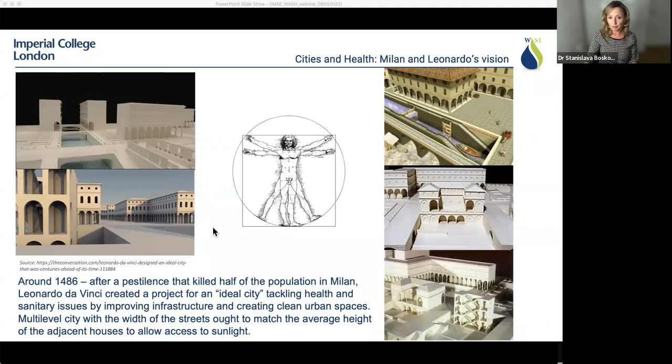All these projects, although seen completely from the planning and engineering point of view, were driven by public health and well-being. I wanted to draw your attention to another very important direction for someone interested, as our research group is, in health and well-being: the work 'Hygeia, A City of Health' by Benjamin Richardson, who was not a planner or engineer, but gave a very precise description of how he thought the city of health should look.

He gave dimensional characteristics, and the population of the city was very well defined. He also talked in his work about distribution, the safety of population, and the equal distribution of population between houses. Of course, about the very important urban element of accessibility, talking about three wide main streets or boulevards, and also the division of different transports in a way to maintain clean air and avoid any disturbance to the life of citizens, always guaranteeing ventilation and housing full of sunlight.

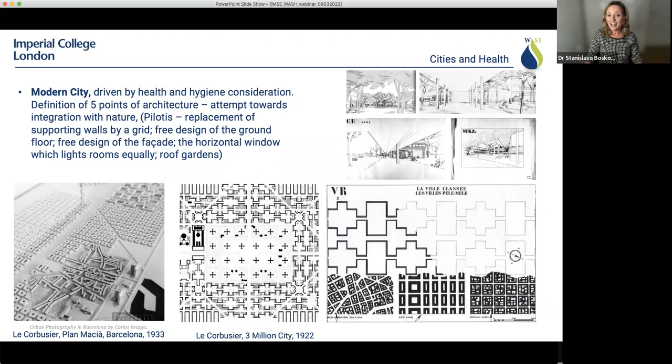So the free grid on the ground floor, in a way that there is always contact with vegetation, the horizontal windows which allow light to be equally distributed in every part of the city, and generally the change of the city from narrow Gothic medieval streets towards a new dimension of blocks that would enhance dialogue and integration between nature and the citizens and residents of the new cities.

As Anna mentioned at the beginning, after this brief introduction on the relation between urban planning and health, our group is working on two European projects, and the first one is HEART, which is Healthier Cities Through Blue-Green Regenerative Technologies. We have just started, and I will make a brief introduction, and hopefully on some other occasion we can speak more about the results or progress of the project.

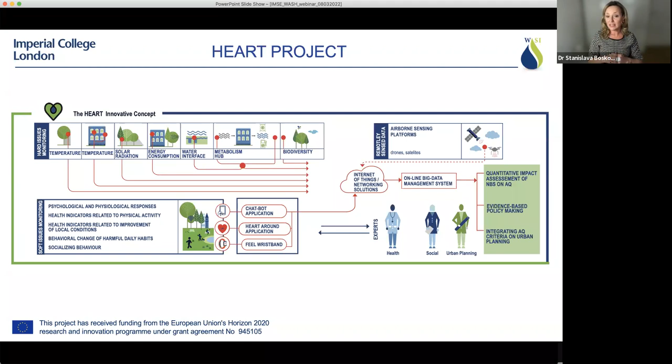This is a project that will use not only the knowledge of the experts involved, but will also have a very strong presence of different stakeholders involved at municipality or governmental levels of the cities being studied, as well as citizens and all others interested in improving health and well-being and improving the health-centered tools that are focused on improving the spaces where we are living.

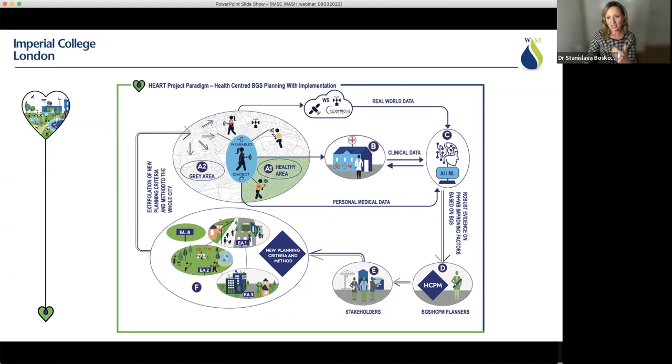And if modern medicine has placed the patient at the center of the health system, this project HEART also wants to put the health system at the center of planning decisions and planning processes that have to be performed to improve the impact on public health, on citizens' emotional state, and also on socializing possibilities, generally improving the process of planning for achieving results that benefit public health and well-being of the citizens.

And now I will focus on another European project called euPOLIS, from the Greek language, which means the city, polis, and health and well-being, the pleasance. So this is the euPOLIS project, a 4-year project, and we are now in the second year. So the introductory and initial part of the project has already started.

This project introduces an integrated urban planning methodology through the implementation of nature-based solutions in public spaces. We will have concrete interventions now in the phase of definition, and hopefully prove the results we are aiming for in 4 European cities: Belgrade in Serbia, Gladsaxe in Denmark, Łódź in Poland, and Piraeus in Greece.

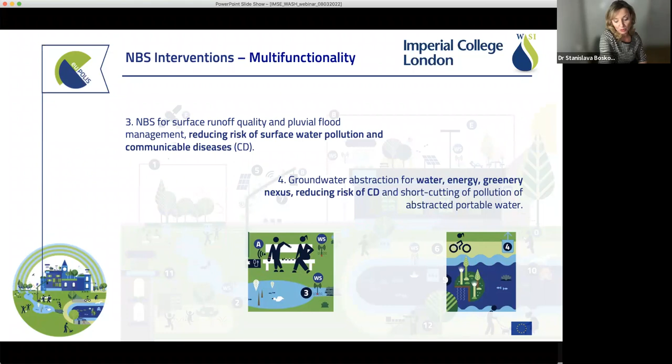Groundwater abstraction for water, energy, greenery nexus, again reducing risk of communicable diseases and shortcutting pollution of the potable water. Of course, air pollution is a very topical issue in many of the cities that we are analyzing now, and we are studying a list of interventions for them in our demo sites.

So these NBSs and the combination of trees, vertical green curtains are meant to reduce the risk of non-communicable disease levels and improve the noise condition, generally having a positive impact on public health of all vulnerable groups: children, elderly, and disabled persons.

There are also technological elements that are helping to create new elements such as green bus stops, and to introduce more typologies of NBS enhanced public spaces, in that sense to increase the number of citizens that use outdoor activities and interactions, creating a positive emotional attachment, as we saw before.

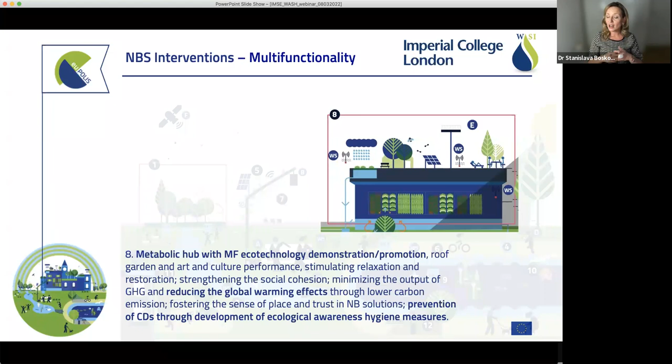And this Eco-Edu Hub, I will show you an already advanced scheme, an example of this Eco-Edu Hub in one of our demo sites, where we will integrate educational notions along with demonstration of NBS technologies. We will also include water treatment facilities and spaces for gathering and developing ecological awareness, necessary hygiene measures, and so on.

Additional elements are multifunctional floating islands that could help for river water purification and improve microflora, and of course the purification of water, but also reduce the risk of communicable diseases that go through the urban water bodies, which could be rivers, in our case, but also lakes or other types of wetlands in the area we are studying.

And we have also demo sites that are on the sea coast, so there are also NBSs that are focused on marine aquatic biotope to improve the quality of the coastal line, and also the spaces connected with the development of nature-based solutions through business activation and promotion of the project, and the sharing of knowledge and experience.

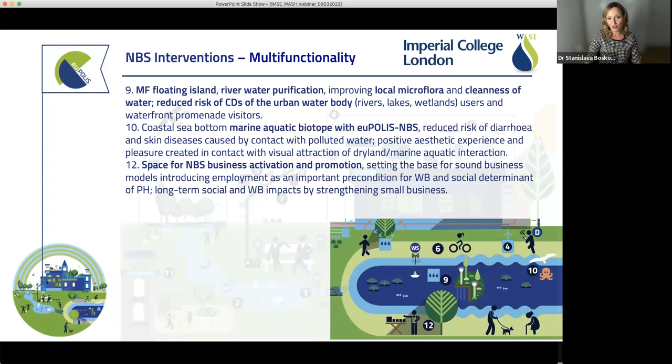Of course, the multifunctionality and integration of different NBSs can be described in the best way through the different functions of trees: shade, but also cooling, air purification that we all know, and creating a wind barrier where it is necessary, like in some of our case studies in Poland, for example.

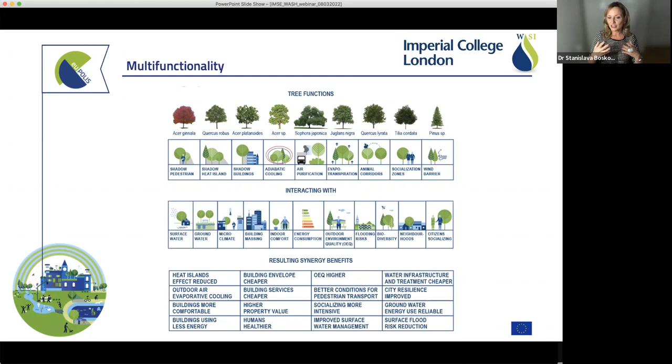The aim of this project is to make these tree functions interact with other elements such as surface water and groundwater, resulting in synergy of benefits, and also to very carefully analyze the choice of tree species that are adapted for specific case studies.

As we know, there are many positive effects, but also some negative effects of trees. So the choice of tree species is very important in our cities to avoid pollen emission, and in that way avoid the allergic effects that are very perceivable in some of the cases we are working with.

To help monitor both the baseline and then the further stages of the project, the results or changes in performance of these spaces after the implementation of blue-green solutions.

There are different devices that will be used, from sensors to remote sensing, but also wearable devices that our technology provider partners will not only choose, but will also help us define eligibility and recruitment criteria of volunteers, train customer supports, and provide proper assistance to citizens during their participation in the project, where information about their emotional well-being will be collected, for example, through this Feel the Emotions device.

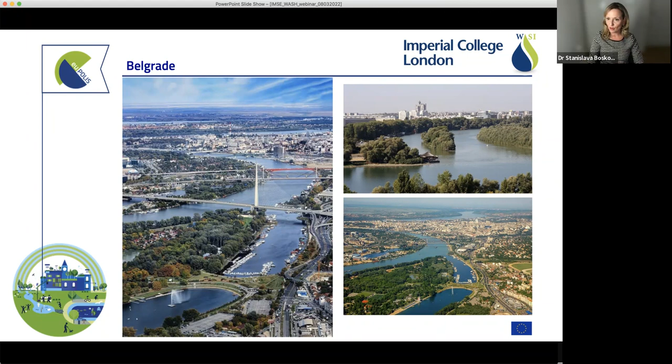The task of our project is to achieve even more benefits with the potentials present in the city, but also identify some gaps and improve the conditions of rivers or ponds where necessary through surface water purification, making the already very rich blue-green infrastructure of the city even better and focused on health and well-being.

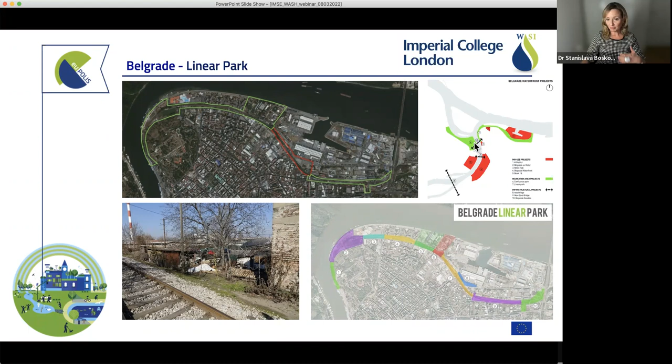And then to connect it also with one of the already existing parks—this is the second demo site in Belgrade, Ušće Park, very loved by citizens of Belgrade, with many recreational and cultural elements, cultural amenities of the city. It has to be, of course, always updated and improved in some of its points.

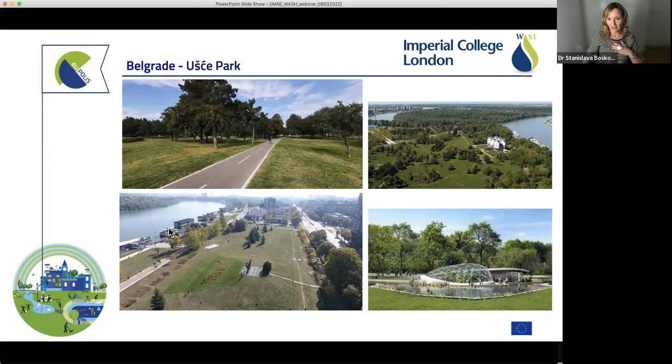This is a specific spot of the park that will be studied, monitored with existing elements, and improved with the addition of the eco-educational hub that I showed you in the initial scheme of NBSs, which could host small-scale examples of nature-based and blue-green solutions, and also the monitoring and data communication equipment. So it's meant to be a real new center for promoting the nexus between urban planning tools, engineering, innovation, and the health and well-being of citizens.

It is meant to serve as a permanent project legacy spot during and after, for further communication and hopefully for the upscaling of the project's effects on the city, but also on national and international levels.

This eco-educational hub is also thought to have a metabolic hub for wastewater treatment as part of the eco-educational hub, with innovative technology that goes from the linear system of consumption and waste to a sustainable and regenerative circular model.

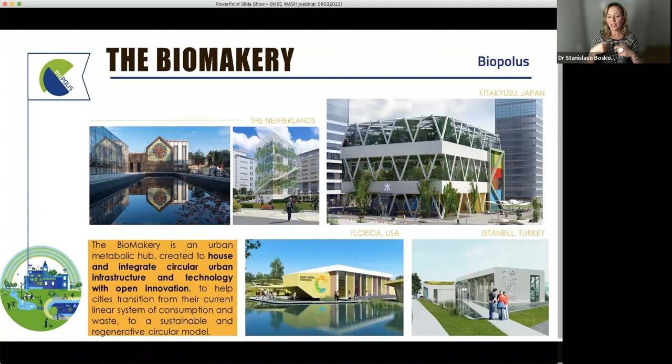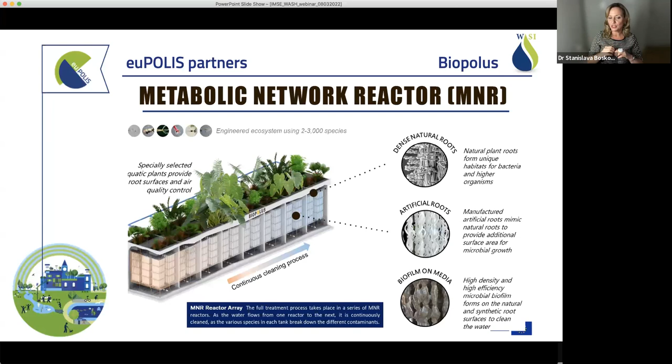This technology has already been developed in many cities, and one of the euPOLIS partners, who has been working on this subject for many years now, will be delivering the technology for a continuous cleaning process, with the plant in the visible part of the structure, combined with natural and artificial roots with high density and high efficiency biofilms on the root surface to continuously clean the water.

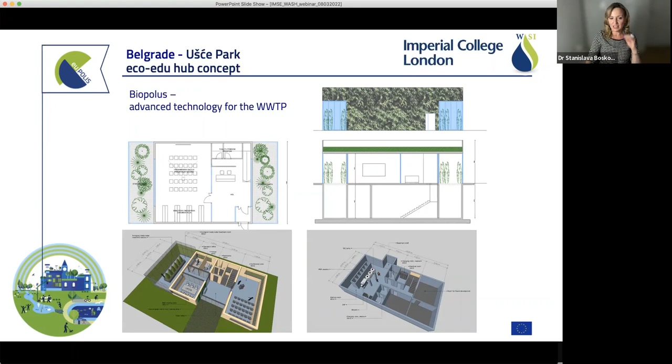This project is in a very schematic view here for this educational hub, but at the moment there is an open architectural competition among students of architecture, supported by the University of Belgrade, to give their idea of the concept for the EcoEdu hub, which they are about to conclude on the 11th of March, and then there will be a...

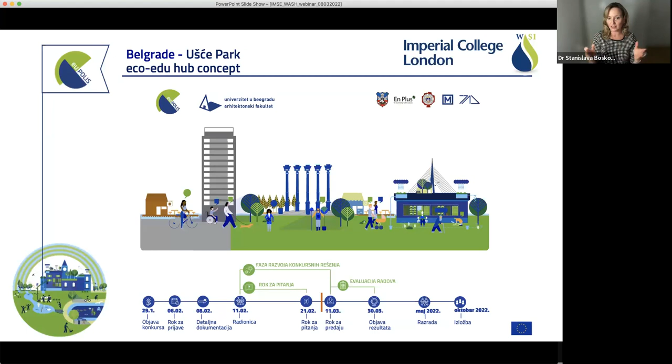...half a month or 3 weeks of evaluation of these works, and one of the most important prizes for the teams of students will be the possibility to work with the experts of the euPOLIS project and technology providers, to develop further the project and to be part of the team building and maintaining the eco-educational hub.

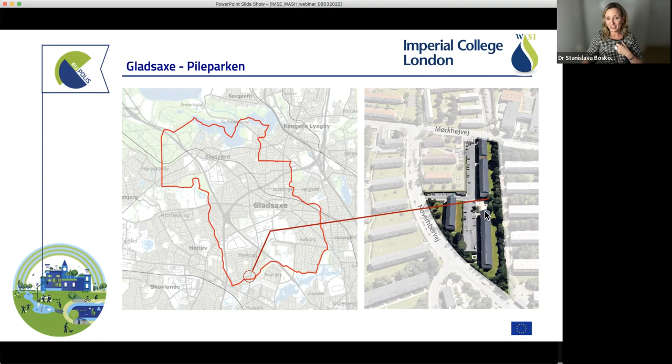Very briefly, there is the demo site, very small scale, especially in comparison to Belgrade, in Gladsaxe, the northern part of the Copenhagen metropolitan area, with a very small site lacking communal spaces for cohesion of citizens, only with some private gardens here, and with problems of flooding.

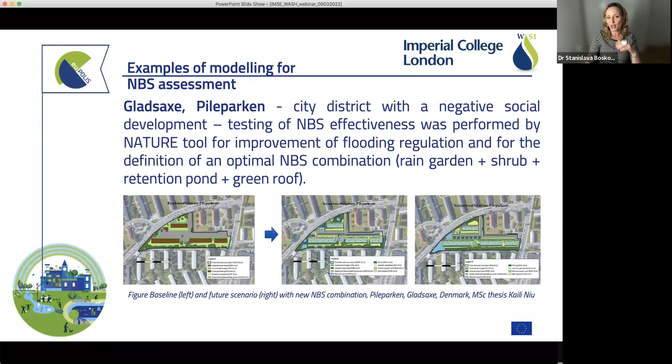So we've been analyzing the current state, the potential of existing elements, and also with some works of our students, studying how to improve flooding regulation and what could be the definition of an optimal NBS combination for tackling this issue. There are different scenarios that could work in that city, and in the next stages of work we will define what intervention can tackle that problem in the best way.

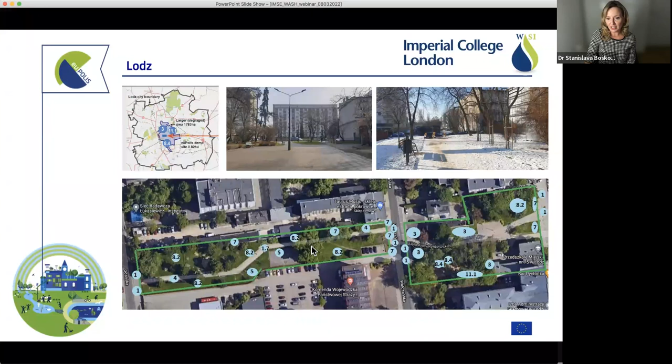Here we are in Łódź, Poland, in a peripheric... central but with peripheric characteristics of the city, because it's a part of the city that is quite marginalized. Nevertheless there are equipment for these open spaces, they are not used properly, and they just serve as open but not vibrant spaces.

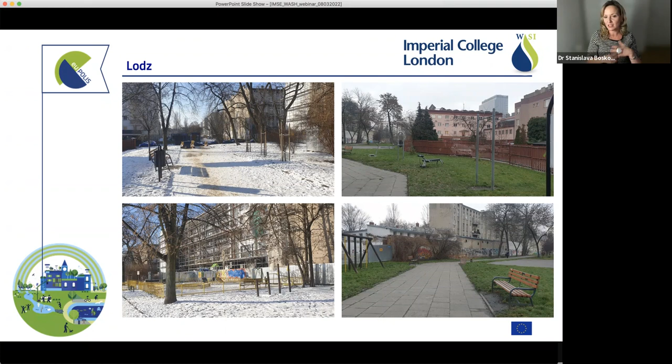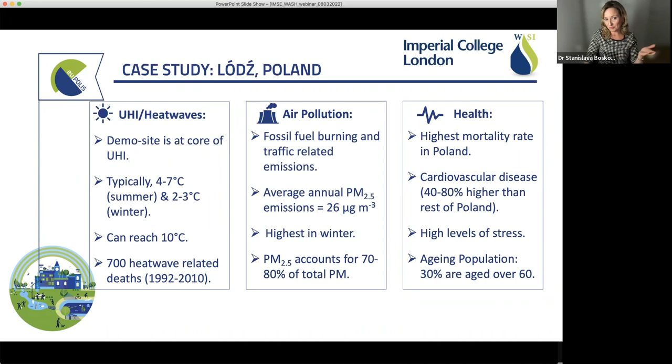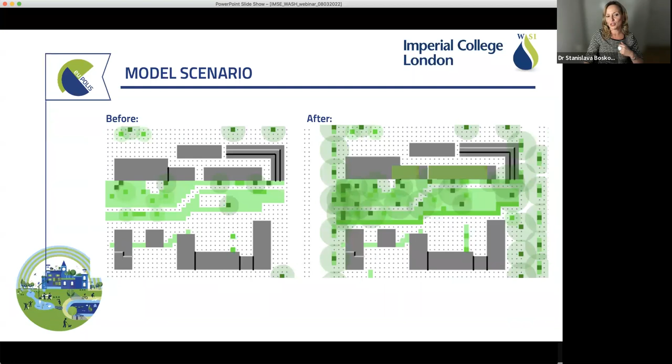So the goal here is to improve the conditions, the microclimatic conditions, because probably one of the reasons is the discomfort due to the very high urban heat island effect. So we are working also with modeling to see what combination and what additional blue-green solutions can really improve the temperature, decrease the temperature, and also improve the quality of air.

And the last frontrunner city is the city of Piraeus, with 3 demo sites, one in just the coastal line, a very intense and densely populated part of the city. Then there is the Canal, Akti Dilaveri, and the school.

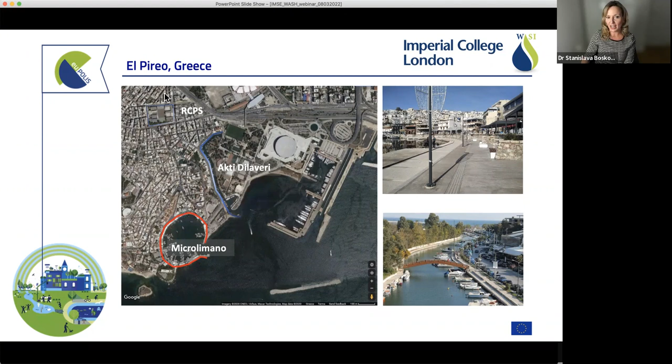In Microlimano, in the coastal line, we have to find the solution together with the municipality on how to improve this almost lack of contact between the sea, the water, and the pedestrian part of the city, because it's occupied by restaurants that are also a very important engine of the economy of the city. We have to find altogether the compromise to maintain this activity, but improve the conditions in that part of the city.

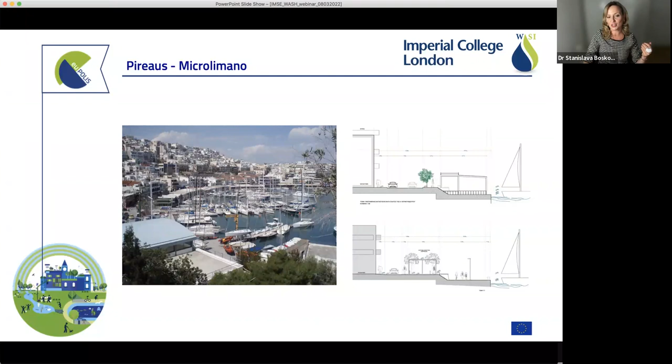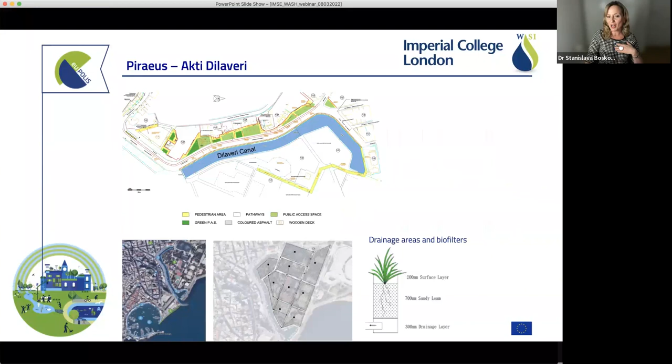Here in Canal, Akti Dilaveri, we are working on improvement of the water quality, which is now considerably lower than expected, and therefore to transform it into a very pleasant and desirable part of the city for walking, recreation, and other activities, but also the possibility to use that water for other functions.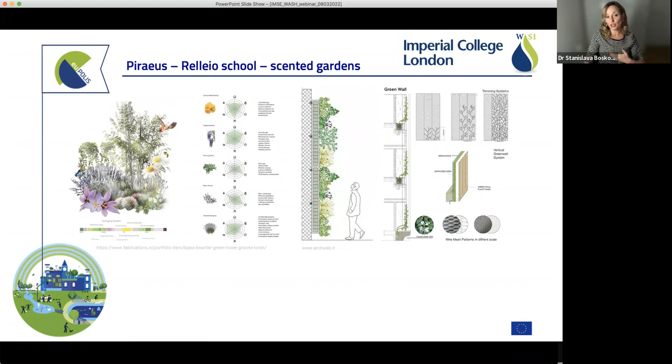And the last demo site in Piraeus is the school, where we are also discussing the possibility of creating maybe a smaller but still eco-edu hub, through the demonstration of NBS solutions for students, and also by introducing some new elements that could be demonstrated, but also that could improve the microclimatic conditions of the city.

And then, without entering into details, but just to name it, we also have these cities that are following and supporting our work over the project with even more diverse problematics, and their projects or interventions will be the subject of some other presentation.

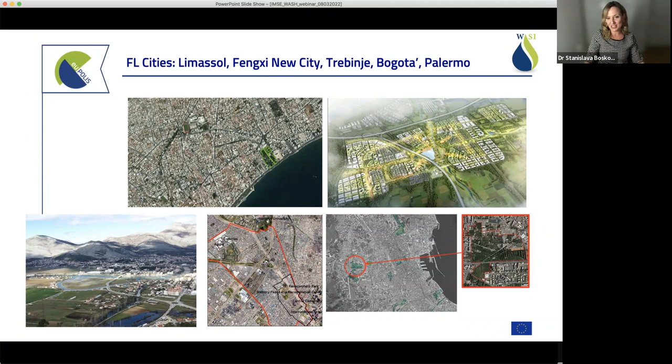Just to conclude, what we believe from the very application phase of the project, but even more after this first year and something of work, is that the importance of a multidisciplinary team is incredibly strong, and the integrated systems approach to the whole subject of health enhancement in cities is crucial. We need innovative monitoring and modeling to be the effective tool that guides us in identifying gaps and achieving the most benefits.

Just to conclude, our project team will continue working on enhancing public health and well-being through dialogue with all relevant experts over the next 3 years. And this is, in a way, an open invitation for further discussion and collaboration on this subject. Thank you very much for your attention.

Thank you. Thanks, Stanislava. Thank you. I guess we can, well, at least I can do a virtual round of applause.